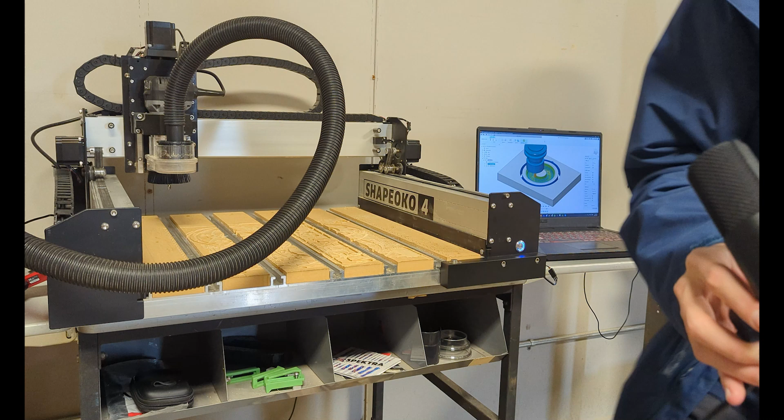I'm going to show you how to mill out complex geometries with the stock quarter-inch end mill that comes with the Shapeoko 4 CNC very quickly. So this is our model here in Fusion, just a few fillets at the bottom and then a chamfer at the top. Make a new setup.

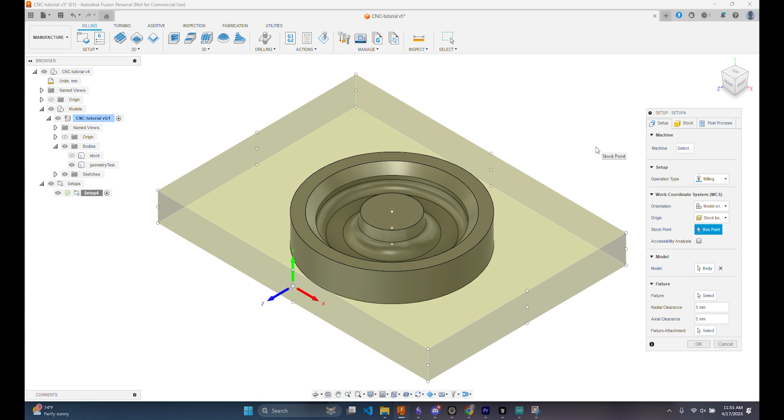Then you're going to want to change the stock mode to from body and then select the body that you're using as your stock material. Currently we have our z-axis kind of sideways, so you're going to want to click orientation and then change that to the z and x-axis plane. And then you want to find a z-axis reference and an x-axis reference, which you can do by just clicking on the edges on your stock material.

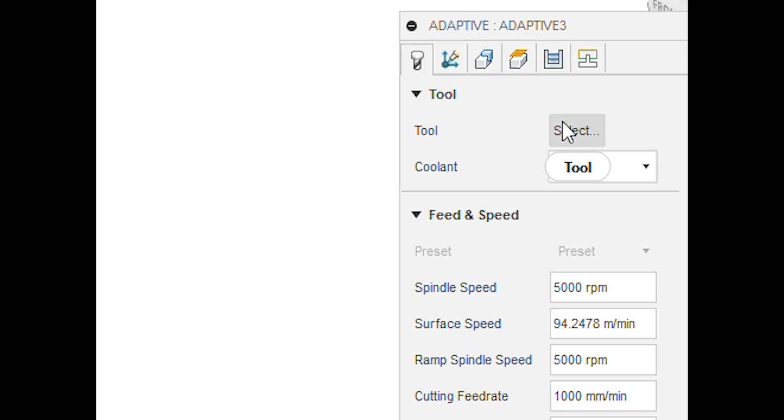Select the machine, in this case I'm using a Shapeoko 4 standard. Find the adaptive clearing operation in the 3D tab. Select your tool. Filter for milling bits. Select the flat end mill and then select the quarter-inch flat end mill that's overall 2.5 inches. This is the stock bit that comes with the Shapeoko 4.

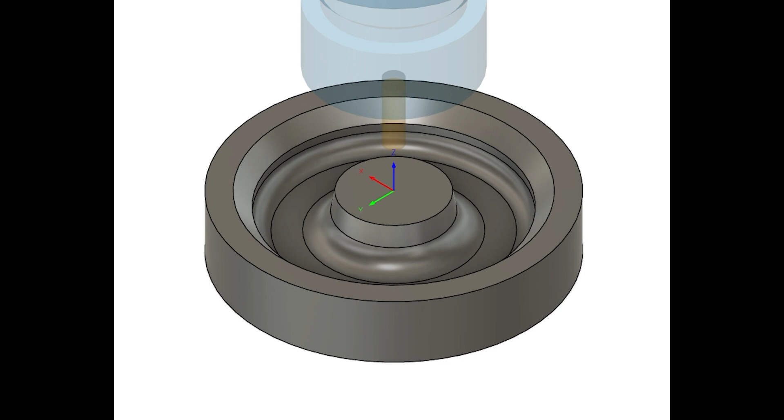Back in the adaptive clearing selection menu, go under geometry and then set the machining boundary to selection. Select the outermost edge of your model. You can now set the surface groups to the top face of your model. After you hit OK, this will then generate the 3D adaptive clearing toolpaths, and they're generating right now, as you can see. Select 2D contour.

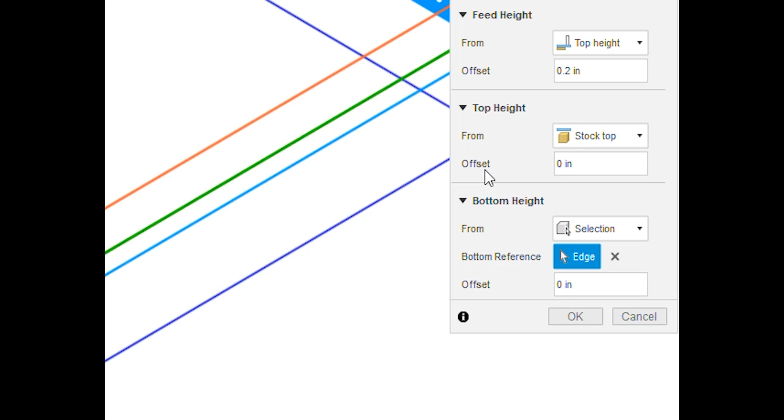Switch to the geometries tab so you can select the contour of your model. Select the bottom edge of your model and switch to the heights tab in your contour selection menu. Change the bottom height selector to selection. Select the bottom edge of your model. Now change the top height selector to selection. Select the topmost edge. Now change to the passes tab.

Check off multiple depths and make sure that this value is half of your bit diameter. Go back to geometry and make sure that the tabs are enabled. After you click OK, Fusion will generate the contour toolpaths for you. Select simulate, and here you can just simulate your model and make sure that you got everything right in your CAM setup and nothing's totally out of whack.

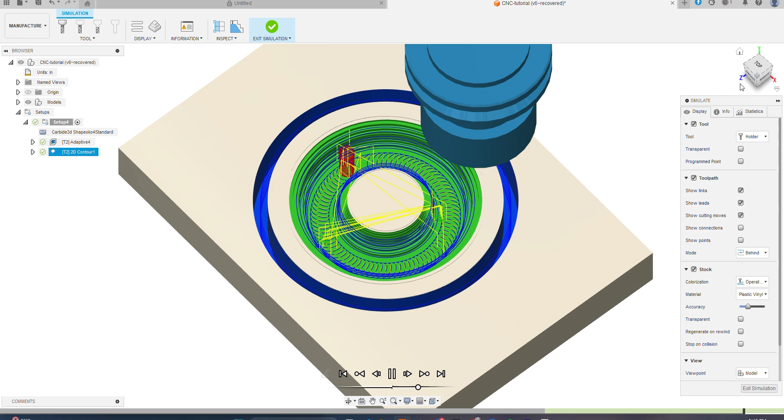Select post process. Here you can rename the file, that way we can export it and throw it into Carbide Motion. After your machine is initialized, just go ahead and jog your bit over to where we set the stock point in Fusion CAM and set the zero there. Load in the file exported from Fusion and then click over to the 3D viewer tab just to make sure everything is all good. Start the job, and there you have it. You can actually start milling the file now.

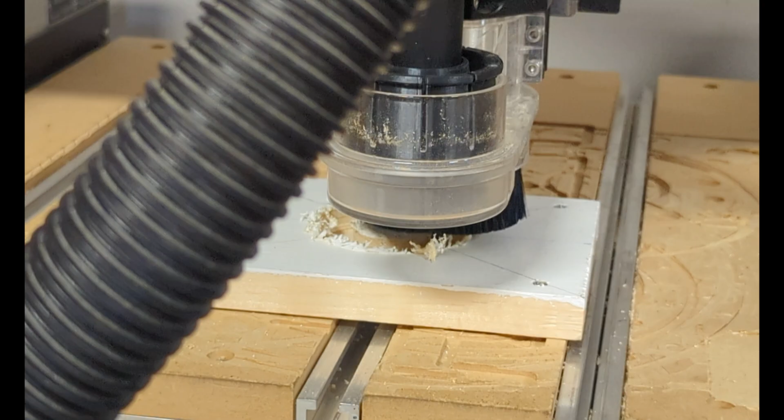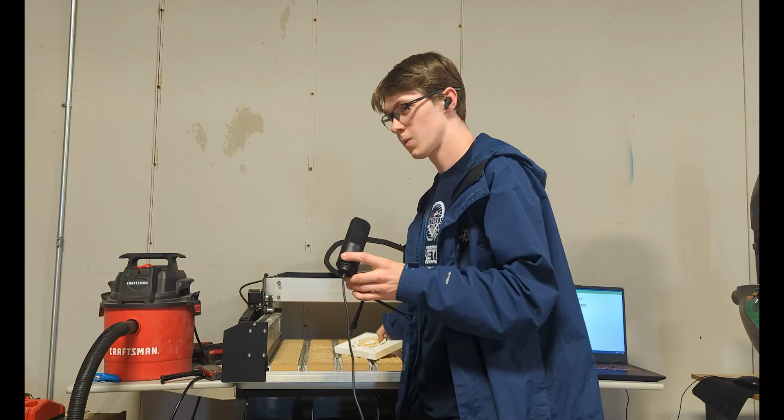As far as work holding goes, I just fixed the stock to the sacrificial board with some spare screws that I had. I think I actually prefer this method over using the clamps that the Shapeoko includes. Okay, so the cut went well. There's a little bit of tear out here on top, but this is just sort of expected because the stock bit that's on the Shapeoko 4 is an upcut end mill, and because the top layer here is paint, it just sort of stuck to the wood and didn't actually cut away, but a little bit of post-processing would help with this. As you can see, the actual geometry is just as expected.

So if you ever wanted to add features like fillets or chamfers to your model, but all you have is an end mill, this is how you would do that.